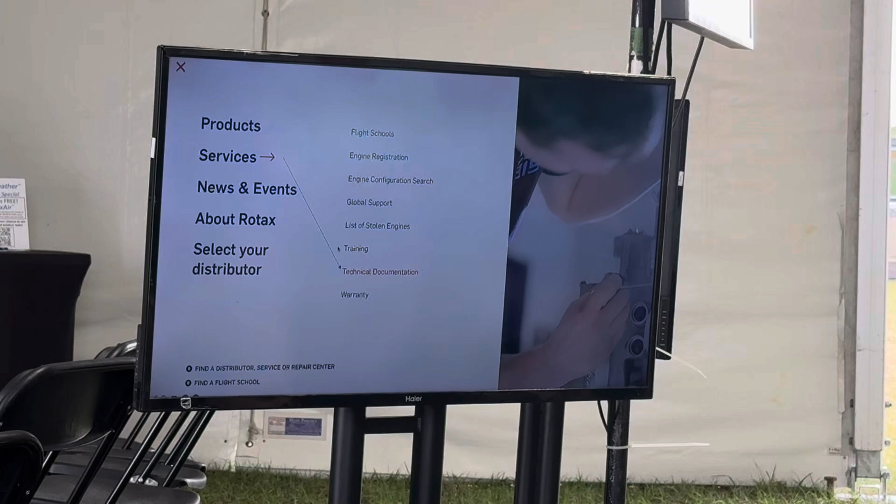It's not for promotion, but if you go to the menu in the upper left corner here, tap on menu, it'll bring up this screen. Click on services, and then down you'll see where it says technical documentation. Can you guys see my pointer? Kind of, there a little bit. Click on technical documentation, and it'll pull up all the manuals and service information you can get.

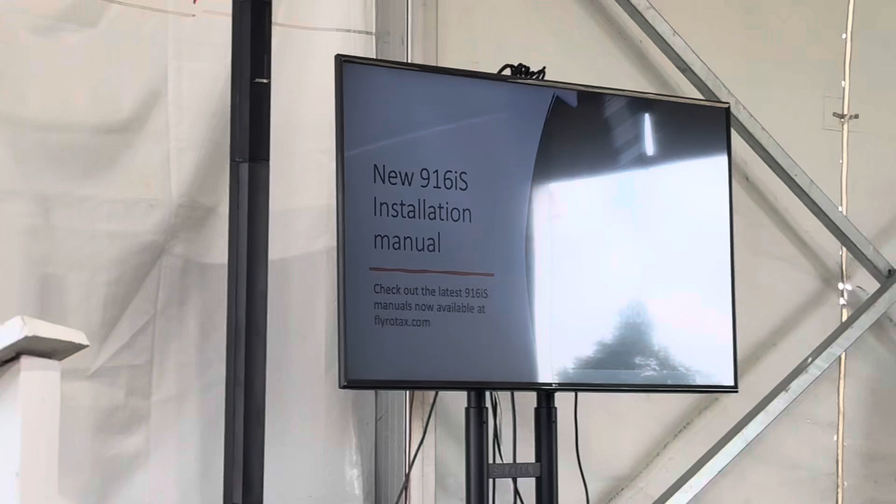In this case, there is a new 916 installation manual, and all the engines have an operator's manual, a maintenance manual, and an installation manual at the minimum. Again, those manuals have a lot of really good information in them.

So let's talk about the spark plugs. Rotax has changed the spark plugs recently. We used to use the NGK spark plugs, and they have now developed their own spark plug. I think NGK is not real happy about their spark plugs being used in aircraft, so Rotax had to develop their own. It is a very nice plug, an improvement over the NGK. It will last twice as long.

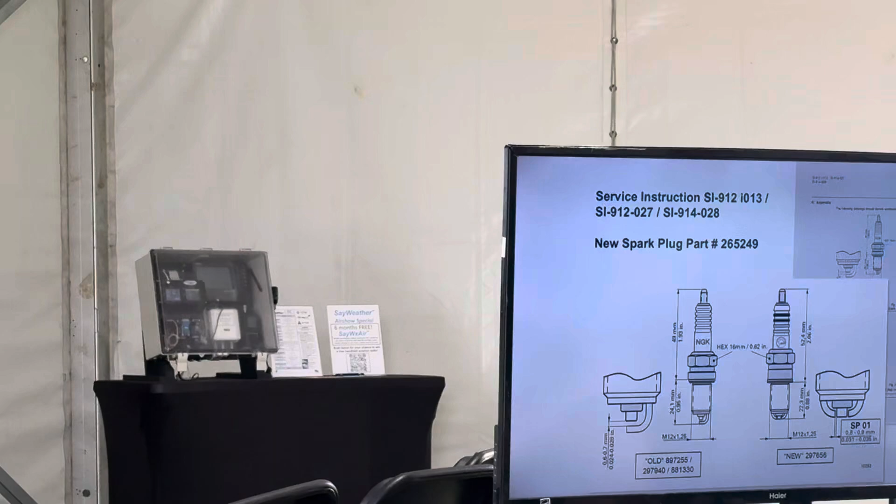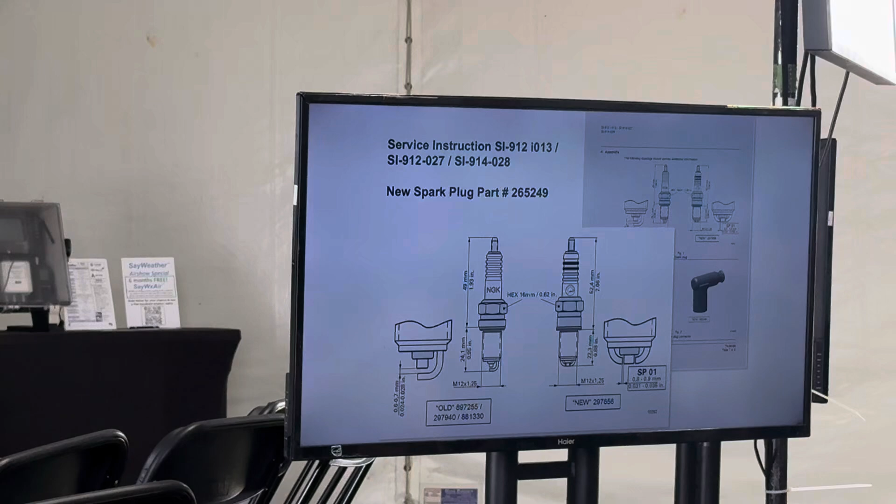The differences you can see pretty plainly in this slide. The new spark plug is a dual electrode spark plug. It comes pre-gapped, made specifically for the Rotax engines. You never have to gap it. Whereas the old NGK plugs weren't necessarily gapped because they were made for other applications, so you had to make sure those were gapped properly. Typically we would gap those to 28 thousandths of an inch. On the new plugs it's 31 to 35 thousandths. So that's the range we're looking for.

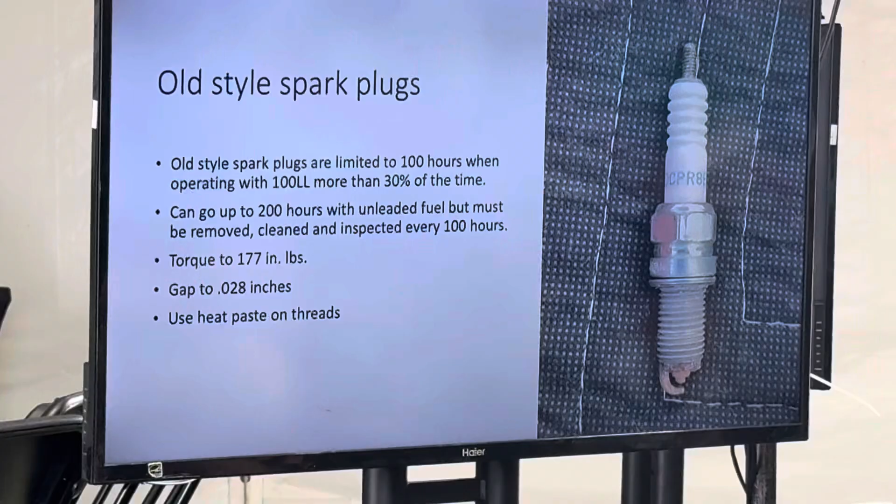Plug life is that 30% limit. You can go 200 hours with unleaded fuel. At that point they have to be removed, cleaned, and inspected every 100 hours. They're torqued to 177 inch-pounds, and gapped to 28 thousandths. On all the spark plugs, whether new style or old style leftovers, you want to use heat paste on the threads to help transfer heat from the spark plug into the liquid-cooled cylinder head.

What's the gap on it? Yeah, and I haven't seen one get to the point where it was at the max. They wear pretty slowly. But if you were to get to the max, then you would throw it away. You can't re-gap those.

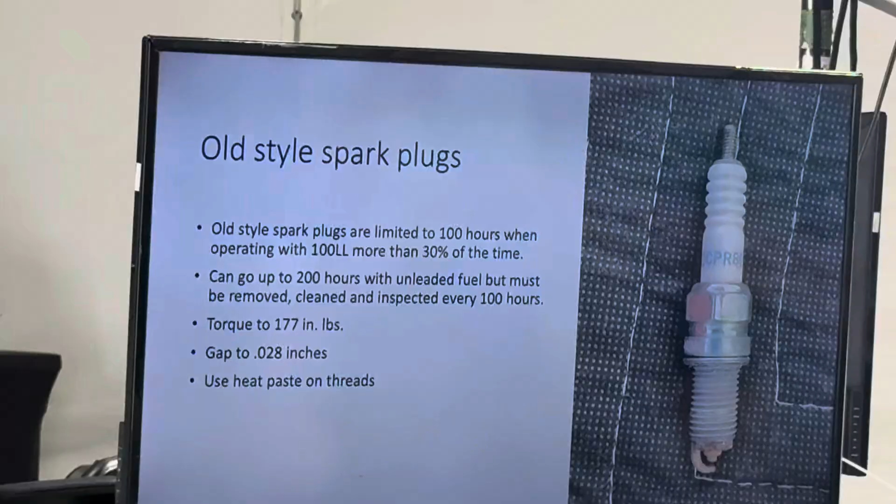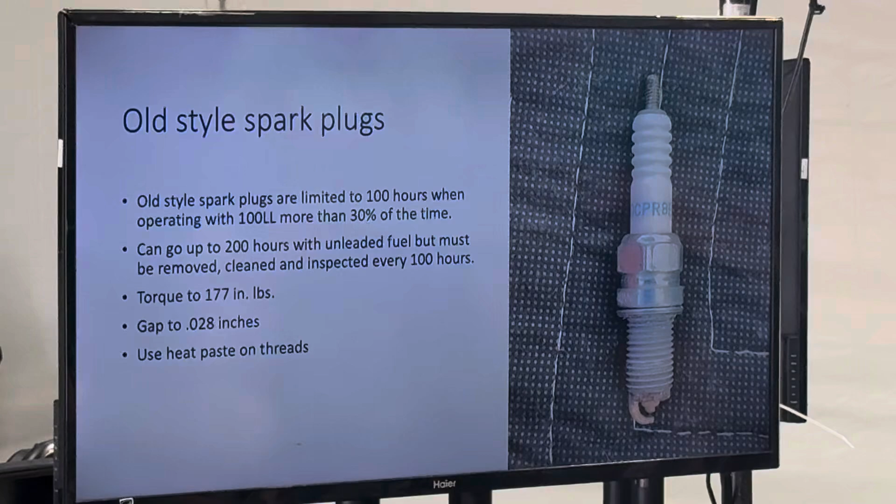Has some paste on it. You can also see that the color of the spark plug is quite good. It's the color of a paper grocery bag, back when we used to be able to get those in the grocery store. That is kind of the ideal color. It tells you that the engine is burning with the right mixture.

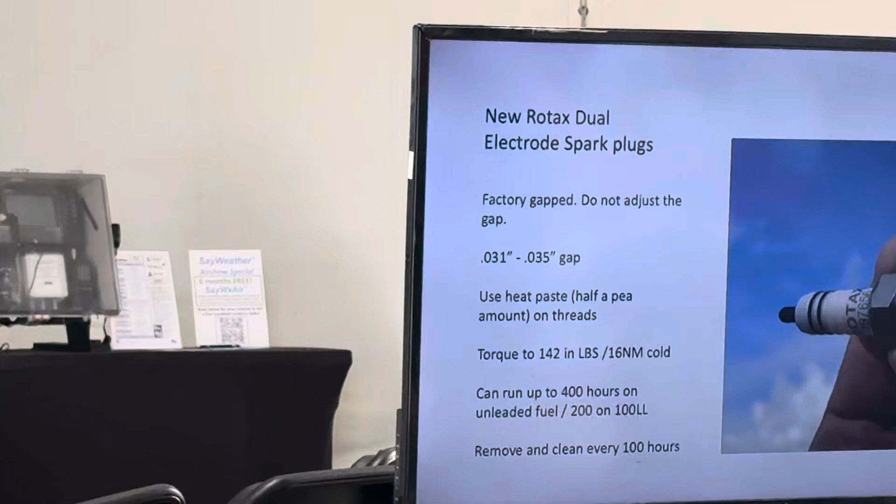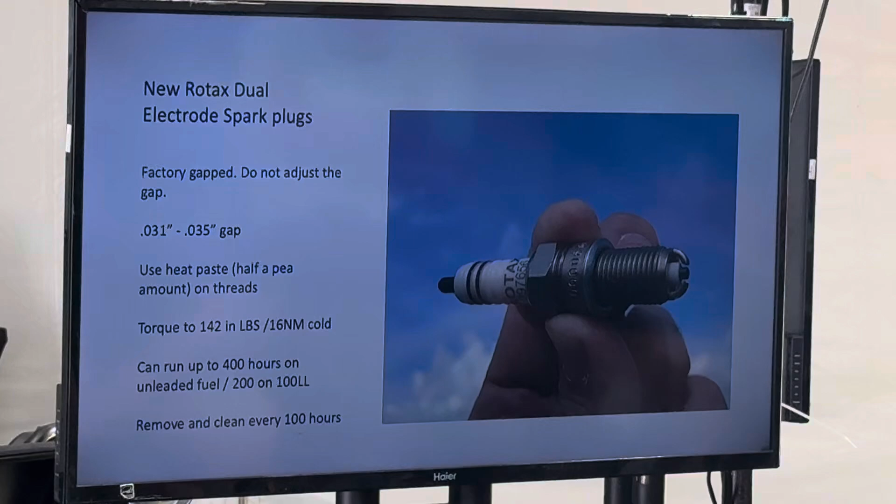This is the new style plug. Again, they're factory gapped, and they're at the lower limit when they start, 31 thousandths. You want to use that heat paste on there, just like half a pea worth of that white heat paste. We do sell it in little tubes, and I think they have it in the booth in building D if you need some. These get torqued to a different spec, so you want to be careful not to mix them up. It's only 142 inch-pounds, which is 16 Newton meters, and that's on a cold engine.

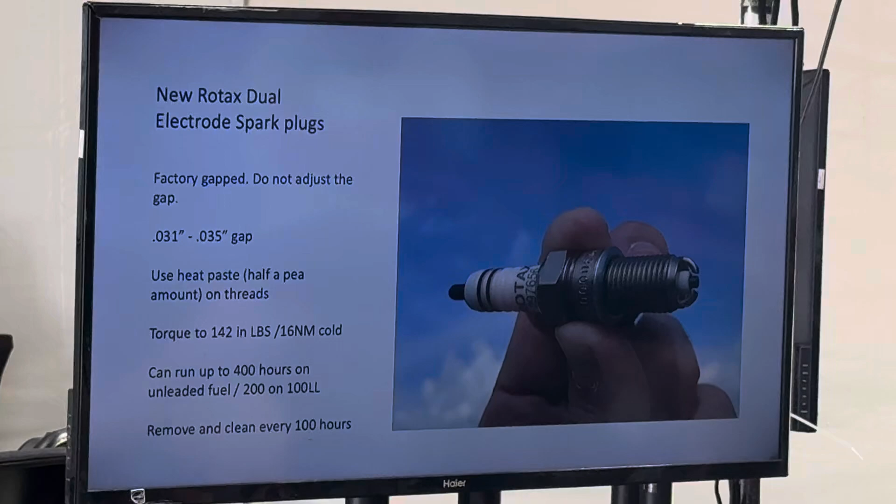Okay, so the engine wants to be cool. You're dealing with aluminum heads. Those can run up to 400 hours on unleaded fuel, either Swift UL94 or unleaded auto gas. If you're using leaded fuel, they still should be inspected and cleaned every 100 hours, and you'll get 200 hours out of them versus 100 for the old ones.

One thing I'll caution you on - some people will go over 100 hours on their spark plugs, especially if using unleaded fuel. You can get more than 100 hours, but the problem is you'll build up a lot of crust on that spark plug. When you pull it out past 100 hours, you might have trouble getting it out because you're dragging carbon buildup through the aluminum head. You might ruin the head getting it out, and a cylinder head is a lot more expensive than a spark plug. So I'd advise you to try not to go more than 100 hours.

If you're a technician working on an engine and you find a spark plug that doesn't want to come out, don't force it. You may be able to gently work it back and forth, but if it's giving a lot of trouble, you basically have to pull the head off, clean all the carbon off the inside where the plug sits, and then you'll be able to get it out without damaging the head.

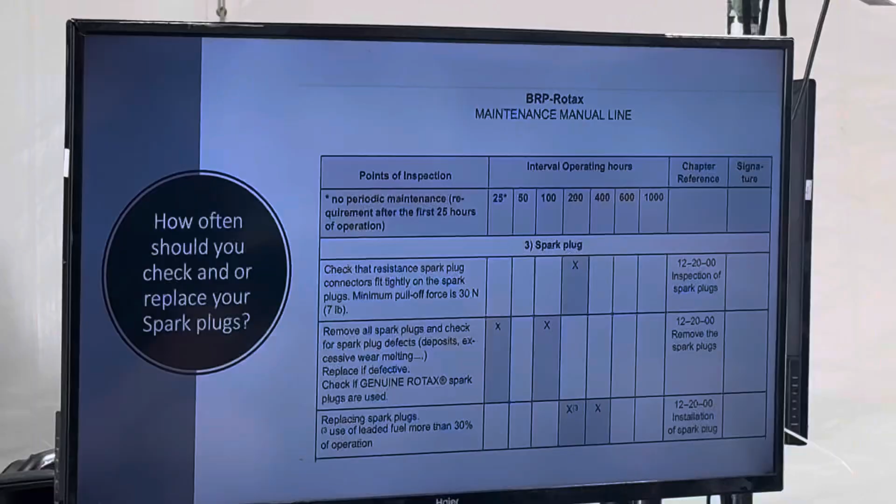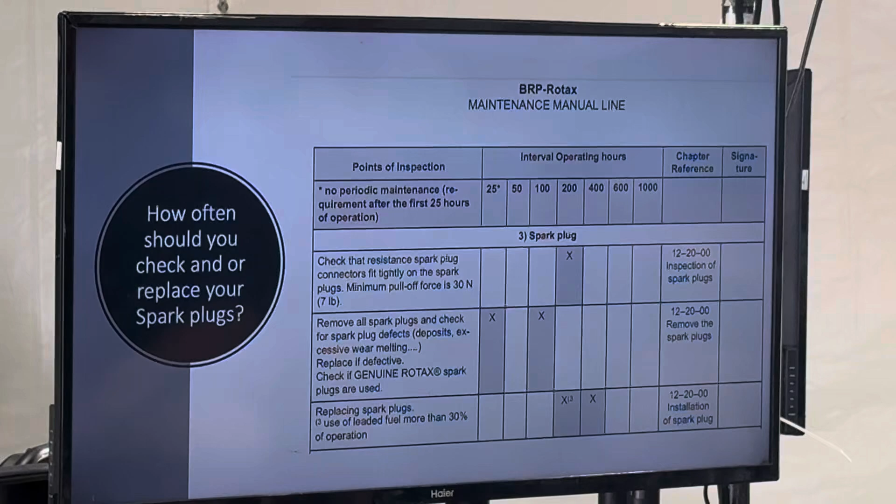The first 25-hour inspection for a new engine is when you want to get that break-in oil out of the engine. You check the spark plugs, and you're basically doing almost everything a 100-hour inspection would involve. That's important on a brand new engine installation - really check everything, make sure you're not getting excessive metal in the oil on the magnetic plug, make sure there are no hoses rubbing, and that everything looks good inside the installation. Check the spark plugs, make sure it's burning properly.

The 50-hour inspection is optional - to be honest, not many people do that. Then you're into the 100-hour intervals. It's pretty straightforward, but I'd advise you to look in the manuals - they'll tell you exactly what you need to do and when. It's all tied to whether you're using leaded fuel more than 30% of the time.

In a case where that plug was in there a long time, you can see how the crud builds up on the spark plug. Again, if you leave them in too long, you'll damage the head trying to get them out.

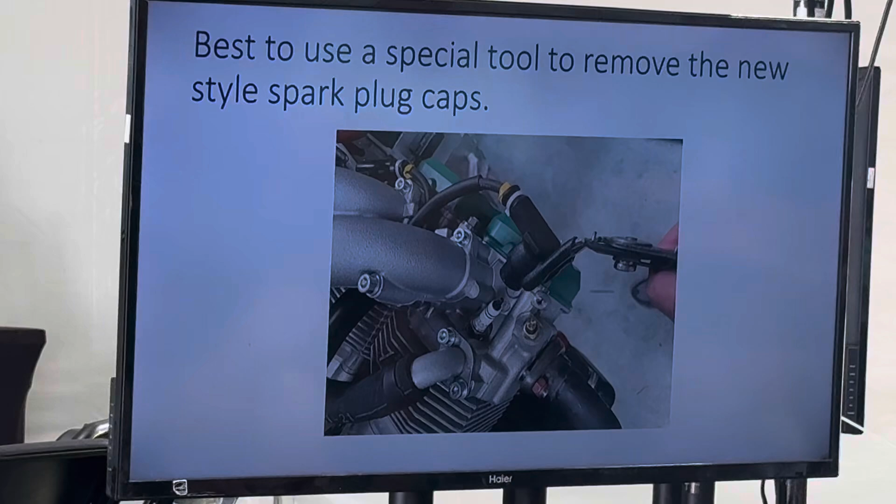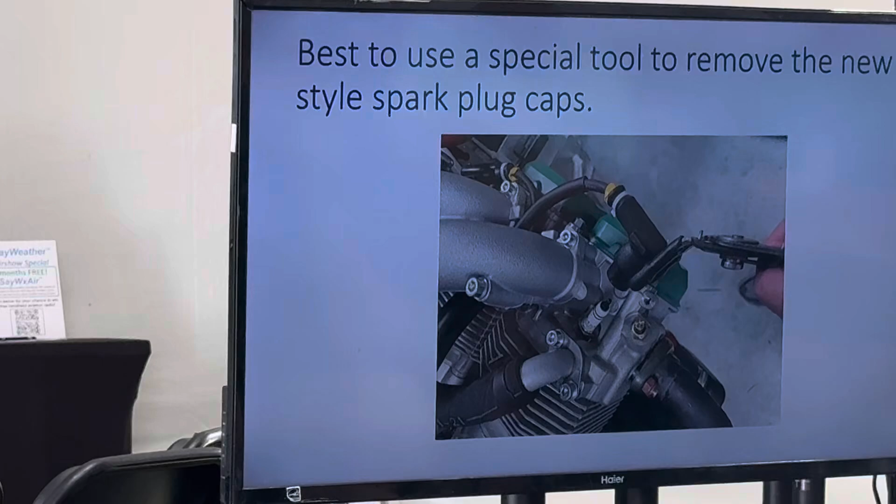For the new spark plugs, it's recommended you use the right tool to pull the caps off, because the caps are very aggressive - they really grab onto that spark plug hard. It's a great idea if you can get the right tool, like shown in this picture, that allows you to pull it straight off. If you force it at an angle, you can break the porcelain on the plug, and the plugs aren't cheap, so you don't want to do that.

So let's talk about oil on these engines a little bit. The Aeroshell Sport Plus 4 has been around for a while - Aeroshell developed this oil just for the 9 Series Rotax engines. It's a great product, and we're happy to have it.

One of the big differences between this and regular automotive oil is that it's got a lot of zinc and phosphorus, a combination they call ZDDP. That really protects the camshaft and lifters, because we don't have roller lifters - our lifters ride right on the camshaft metal to metal, so we need that product. That used to be in automotive oil back in the 60s before unleaded gas and catalytic converters came out. They had to take it out of automotive oil because trace amounts of it would get burnt, go through the exhaust, and destroy the catalytic converter.

But we don't have a catalytic converter, so we can have those products in there. They've even taken it out of a lot of the new motorcycle oils because I think they have catalytic converters as well now, so it's a special product. It does work really well, and I would advise you to use one of the two oils I'm going to show you versus something else which was not made specifically for these engines.

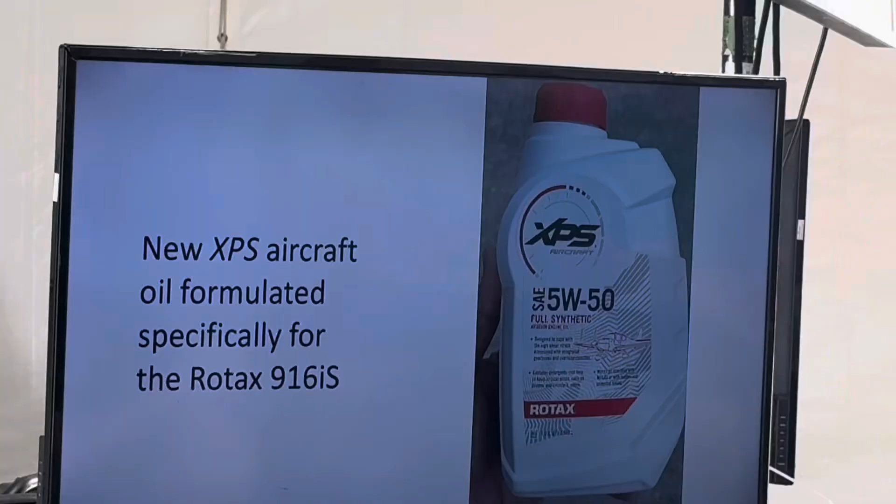It works with leaded avgas 100LL, and that's a real trick. I've talked to a number of people who have been using it with 100LL, and they are very impressed with how well it works at carrying the lead. I think it probably does a better job than the AeroShell, which is a blend, which is amazing. So they've found some special chemistry there that enables them to do that.

As far as which oil to use, I would say if you're running a turbocharged Rotax engine, you would benefit greatly from switching to the XPS because of the full synthetic and higher temperature capability of that oil. Your turbocharger is going to benefit. So 914, 915, 916 IS, those engines should really be running on the XPS now that it's available. If you're running a normally aspirated 912 IS, 912 UL, 912 ULS, the regular AeroShell is fine. Although we do see some benefits if you're running 100LL to the new XPS. So 100-hour oil change intervals are possible with unleaded fuel.

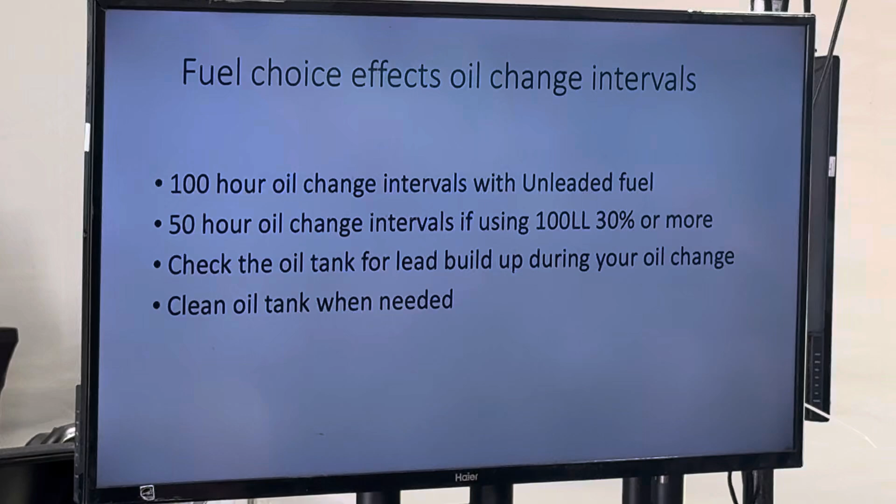Now the unleaded fuel is available in different forms. You've got auto gas, 91 octane or higher for most of the engines, or the Swift UL94. There are some new fuels coming out. Swift is coming out with a new 100R, which we're hoping is going to be a drop-in replacement, and they're actually blending that now. We're hoping that Rotax is going to run a test on that soon, so we're waiting to see how that works out for us.

Like 93 octane ethanol free versus 91. Well, the ethanol free... I can't talk this morning. I didn't get any coffee this morning, man.

Tell you what, so the ethanol free, there are some benefits to it, and it's not as aggressive on the fuel tanks, a lot of the sealants and fuel tank materials. But all in all, it still has to meet the modern emissions, so it still has some of the same drawbacks that all the auto gases have. The higher the octane, the less likely you're going to get detonation. If your temperatures are within the ranges that Rotax gives you for limits, the 91 will do the trick. If you were to go outside of one of those limitations, or over boost in one of the turbos, then the higher the octane, the better.

Florida has 87, 89, 93. You don't really see a lot of 93, but we got a lot of folks who buy it. In fact, I buy mine at the Murphy gas station because they sell 93 octane. Yeah, 93 is fine, I'm just saying 91, I have a hard time finding. Any Wawa has it, 87, 89, 91, 93. Yeah, and if you go to higher elevations, like out west, they won't bother with the 93 because nobody's engine is putting out the power for it, right? A lot of cars, like even BMW, most of their cars say 91 octane or higher is good enough. So but there's nothing wrong with 93. If that's what you can get, use it, it's fine.

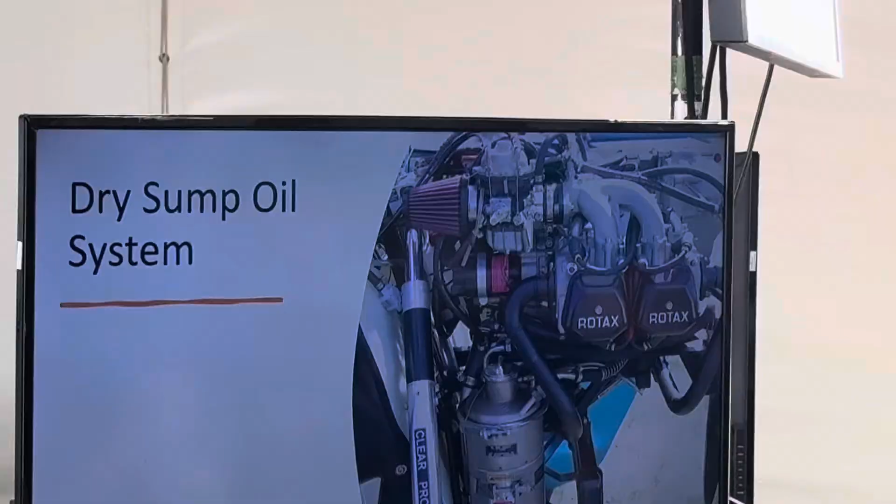You also get a little more cooling on the oil tank, depending on how much air you have blowing on it. With the oil tank being separate, it's a fairly thin stainless steel, so you're going to get some cooling with the oil in the tank. It allows us to have a smaller quantity of oil because the oil tank is ideally shaped, tall and skinny, with the draw tube in the very bottom of the tank, so that we can assure that you're going to get oil at a wide variety of angle of attack.

We typically only have about 3 quarts in the system, which helps keep the engine lighter, better for the environment. We're only using 3 quarts of oil, and of course it saves on oil change costs.

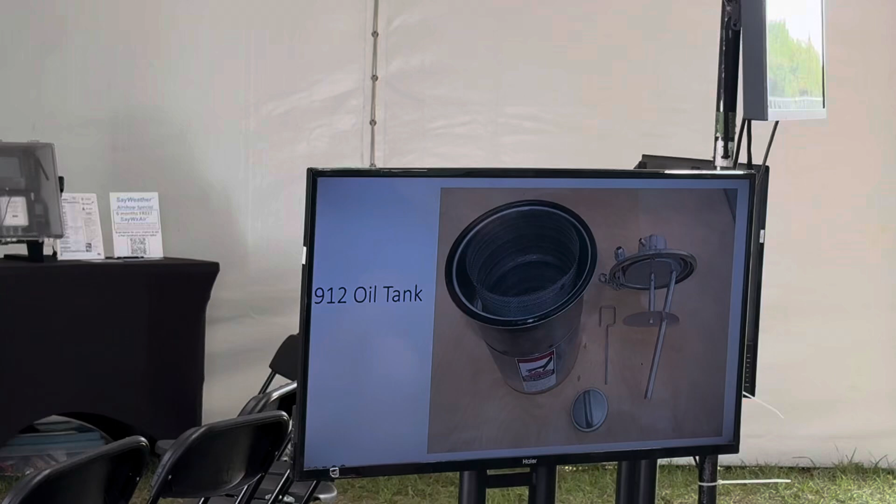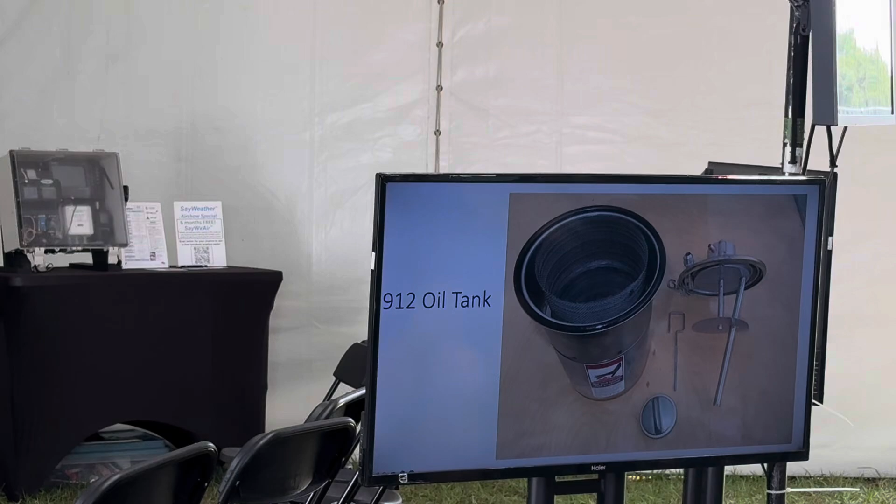That's the draw tube that actually draws the oil, and that's down in the bottom of the tank. Here in the center you can see an oil screen, and on the outside edge is the return line. So the oil from the engine is being returned between the screen and the outer portion of the tank. If there is any metal or bubbles, and there will be air bubbles in the oil that's being returned, that screen will break up the bubbles and stop any large metal pieces from getting into the center area. The center area is where the draw tube is, and you're drawing your oil up.

Again, that screen also is important to break up any bubbles in the oil so that you're getting pure unaerated oil into the engine. Here's a side shot.

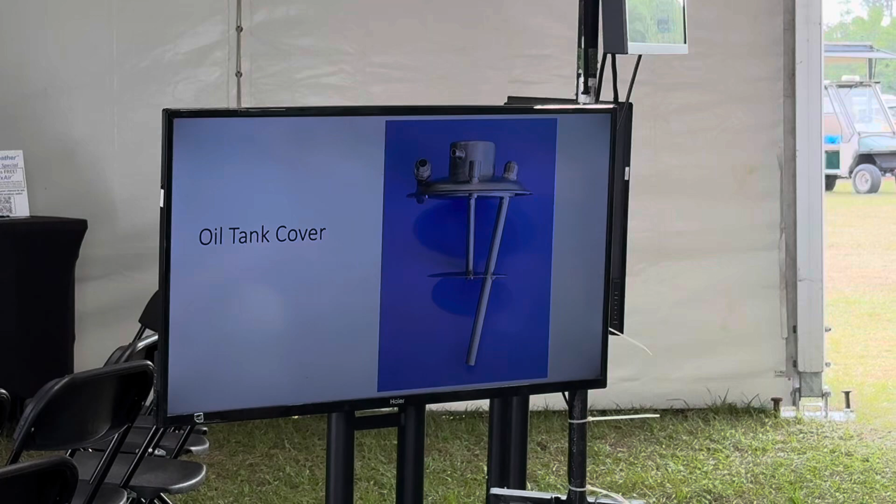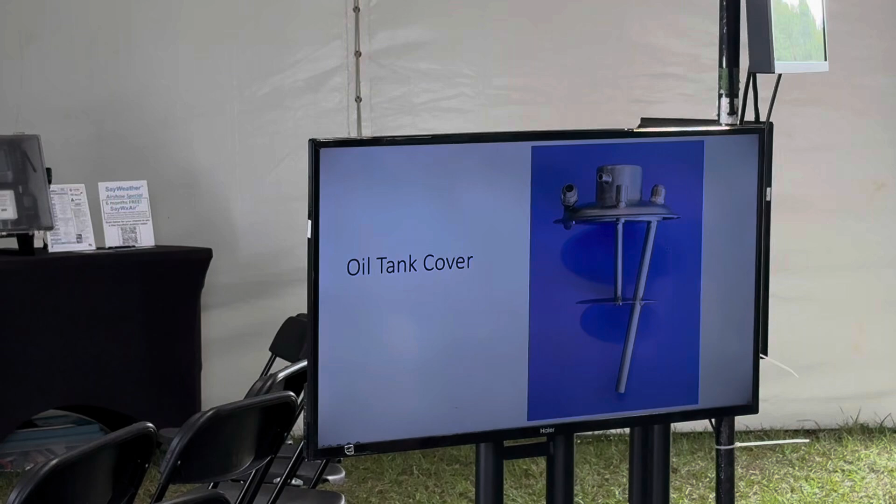It's kind of dramatic in that it shows you what might happen if you hook the lines up incorrectly. If you put your feed line and hook that up to what is the return fitting, the typical oil level in the tank is right about here. You're just going to be drawing air, and you're going to ruin the engine, right? So don't do that, make sure that you get it on the out.

There'll be an out and there'll be an in, and then this little fitting up here is your vent line. The way these engines operate, every piston engine has to have some venting in the crankcase, and ours is no different. Even though the tolerances are very tight and we have very little blow-by, we still have some blow-by. So whenever there's a combustion event in one of your 4 cylinders, some of the gases will get by the rings into the crankcase.

They're going to pressurize the crankcase, and that gas has to go somewhere. The way we get rid of it in the Rotax is we use it to push the hot oil back to the oil tank. So you're going to have fittings on the bottom of your engine. As that gas pressurizes the crankcase, it pushes that oil back to the oil tank. So you're going to get a blob of oil, a blob of air, a blob of oil, a blob of air.

When you burp the engine, which a lot of people talk about when it's cold, what you're doing by pulling the prop through is you're creating some blow-by. Even though you're not getting as much combustion or pressure in the combustion chamber as when the engine's running, you're still creating compression, and some of that is getting by the rings, putting pressure into the crankcase. You're pushing the oil in the crankcase back to the tank, and when you hear a gurgle, that means most of the oil is back and now the air is getting to the tank. So that little vent line is the vent for the crankcase, in essence. As that hot air goes into the oil tank, it escapes through that vent line.

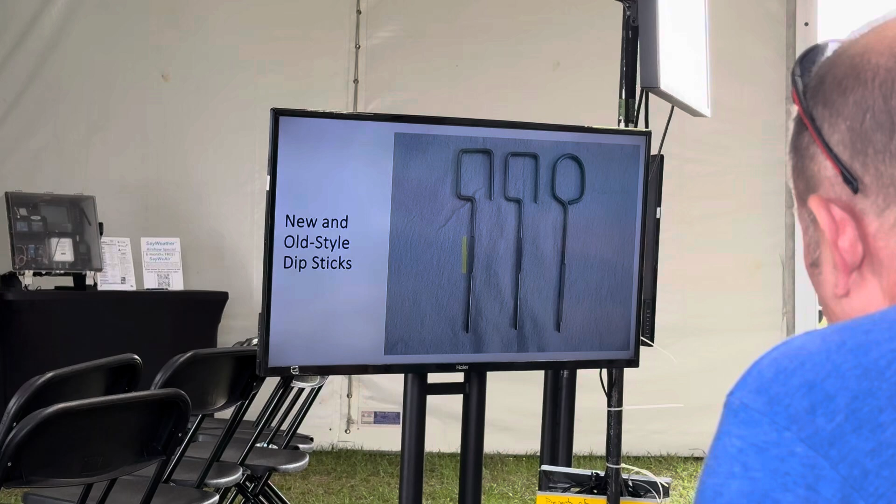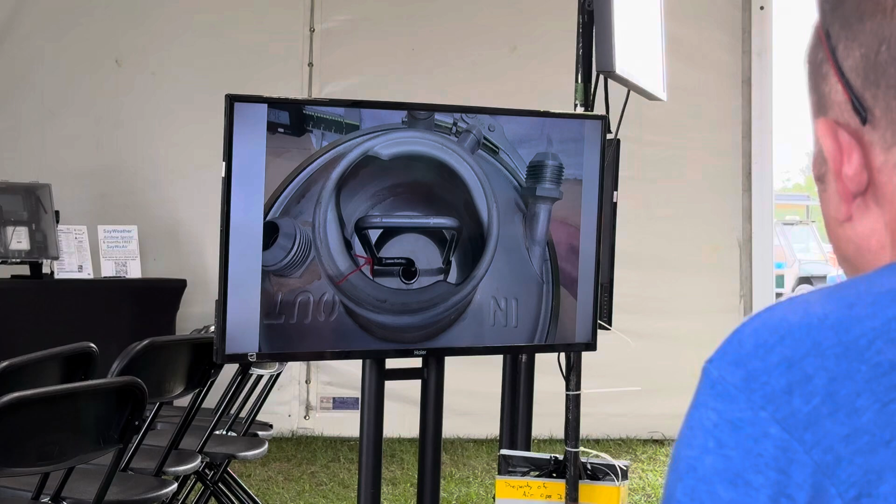The reason I have this shot is if you look at that dipstick on the very left, it's a little different from the others. The top tab that you grab onto is not closed up enough, which means when you go to drop that in, it might hang up. Right here in this picture, you can see where that dipstick is actually hanging up in the top of the tank, and it's not going down all the way.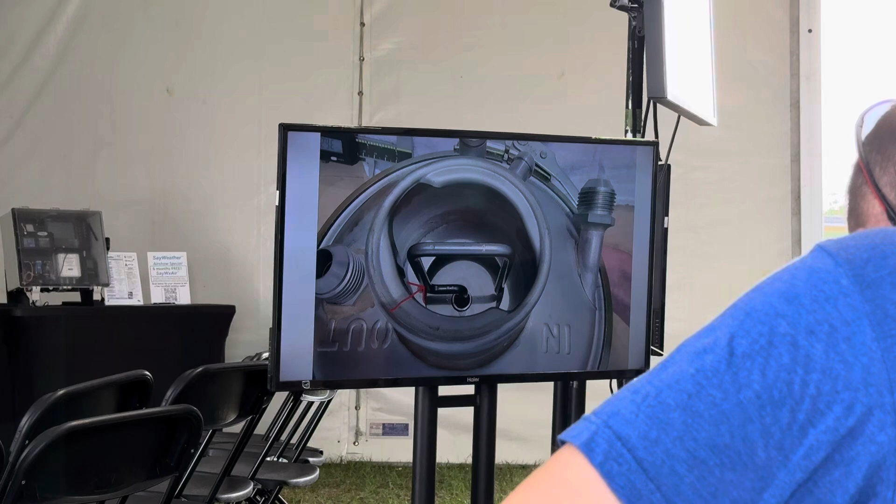You have to be careful if you have one made like that. You can usually push them down, but if you just drop it in, it may not go down all the way, which means you may be putting too much oil in your tank because your level is effectively raised up. So if you get one, make sure yours does go down all the way. And sometimes the hole it's sitting in is not even cut perfectly round. I've seen them where they'll go in at one angle, you turn them 90 degrees, and they won't go in. So you need to be aware of that so it doesn't catch you off guard.

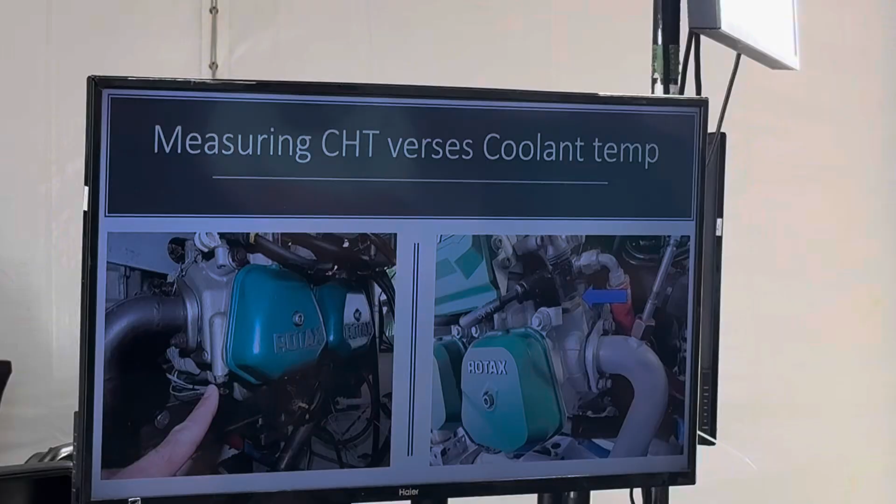What Rotax did was decide that coolant temperature is probably more important than cylinder head temperature because it has a lower maximum. 248 degrees Fahrenheit is the max, whereas on the cylinder head, most of them are 275. So it could be possible that you exceed your maximum coolant temp without exceeding the maximum cylinder head temp.

So on the newer engines, on the right picture there, they switched, and now they're reading at the top of the cylinder, right at the exhaust port, which is the hottest point of the coolant, what the coolant temperature is.

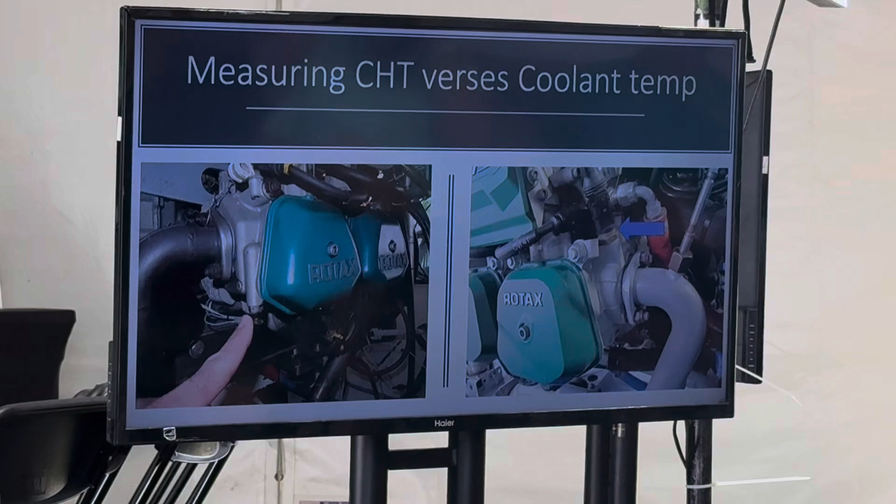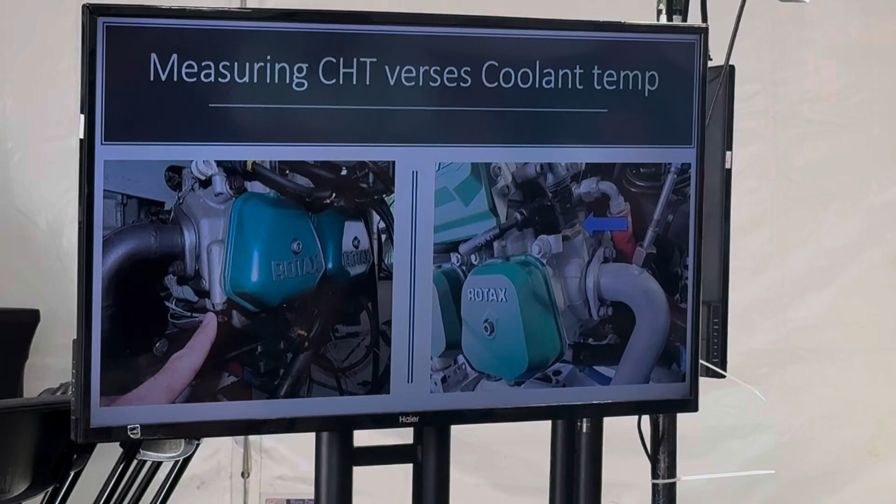So the point is, if you swap engines, if you have an older airplane with one of these engines like the one on the left and you swap to a new engine, you're going to need to recalibrate your instruments. They'll probably be showing 275 as the limit, but now you're reading coolant temp, and it's going to be 248. So you need to make sure your instruments are changed to match that.

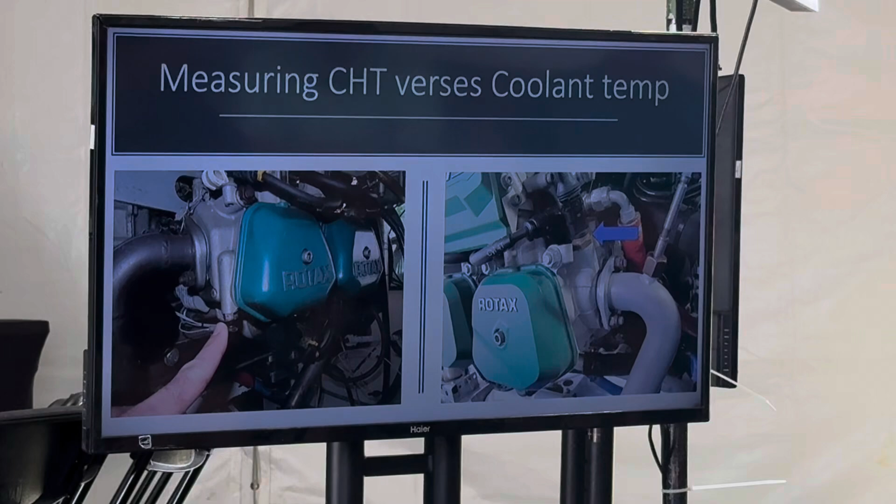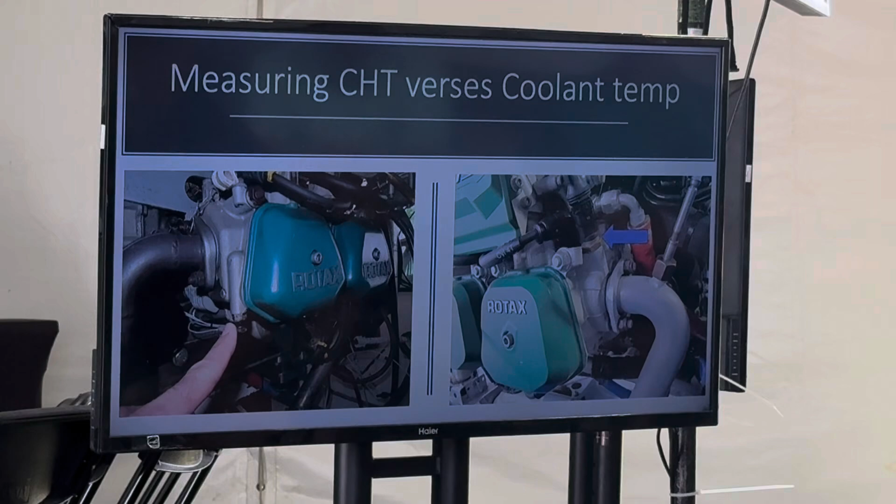We can't get those old cylinder heads anymore. So if you overheat a cylinder head and have to change it, you'll have to put on the new style. If it happens to be the one with your cylinder head temp probe on it, you'll also have to change over and realize that now you're reading coolant temp instead. The heads are compatible, so you can just change one head to the new style.

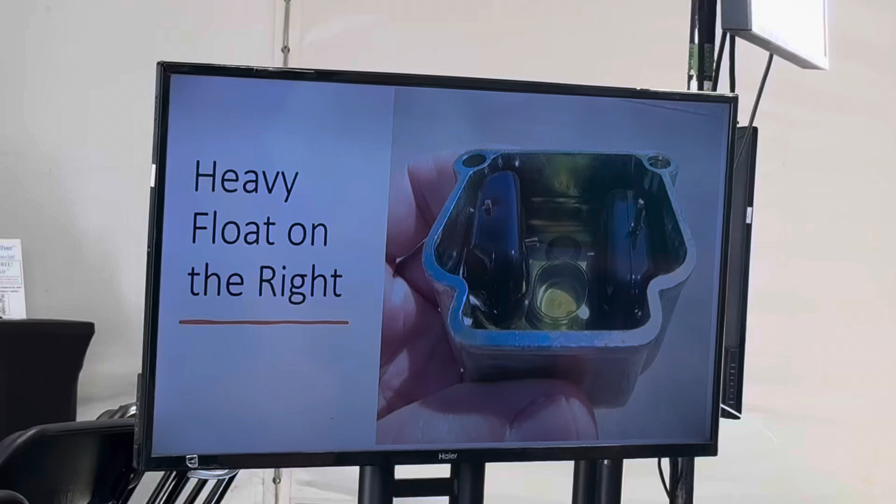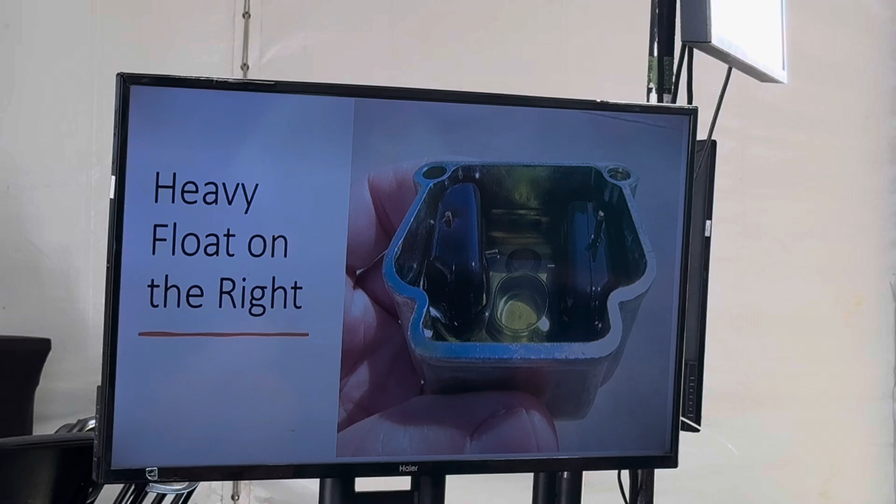It's not the carburetor. We took the float bowl and dropped it off. You can see the float on the right is clearly a lot heavier than the one on the left. Those are floats that probably were made at the same time and installed at the same time. One absorbed fuel and one didn't, and that's what we see.

So this would be a way I would do a quick field check if I had a problem, if the engine was exhibiting a problem that could be related to heavy floats. I could drop the float bowl. I don't have a gram scale with me, but I can see if both floats are floating correctly.

If the top of the float is even with the rim of the bowl, like the one on the left, it's probably pretty good. If it's sinking, it's going to look like the one on the right, and it's going to drop down into the fuel. I've seen them where they sit on the bottom, just sinking right to the bottom of the float bowl.

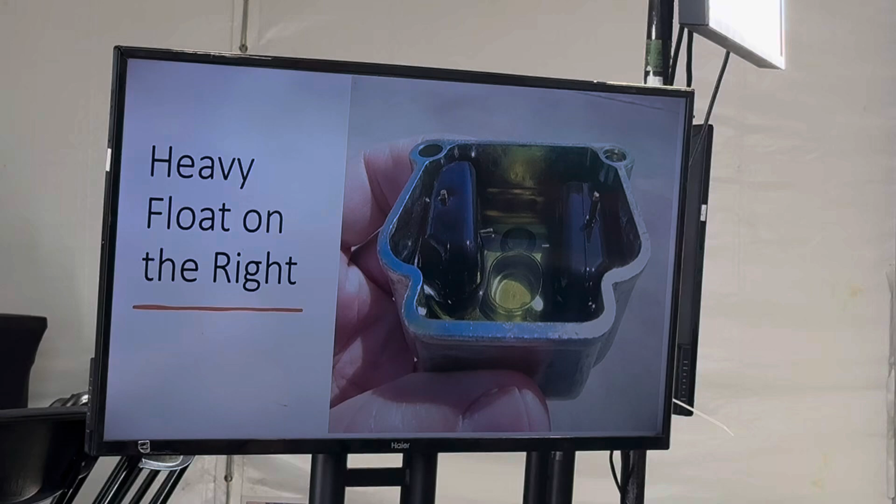But if it's working correctly, the little brass pin that comes out of the center of the float, which the float arm rides on to shut the fuel off and meter the flow of fuel into the float bowl, is right here. You'll see it kind of piercing the fuel level. So it'll be sitting there floating, not above, not below, but piercing the fuel level, whereas the heavy one will be completely under the fuel level.

They can be checked with a vacuum gauge.

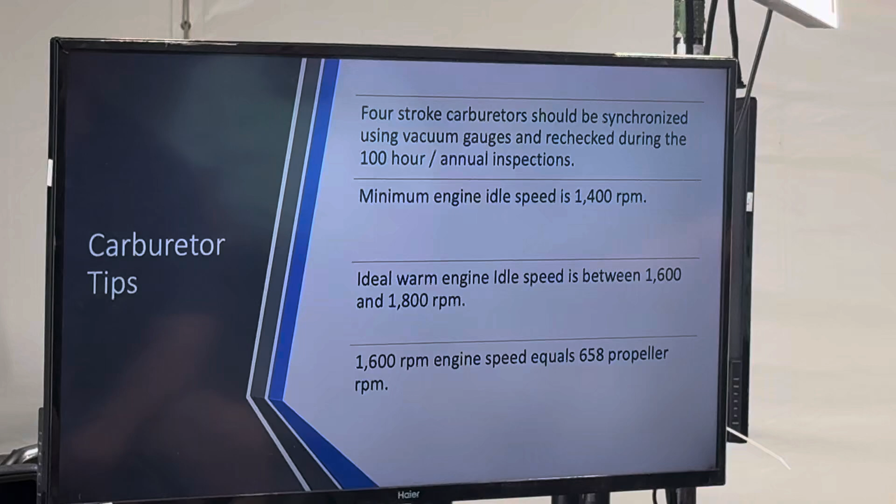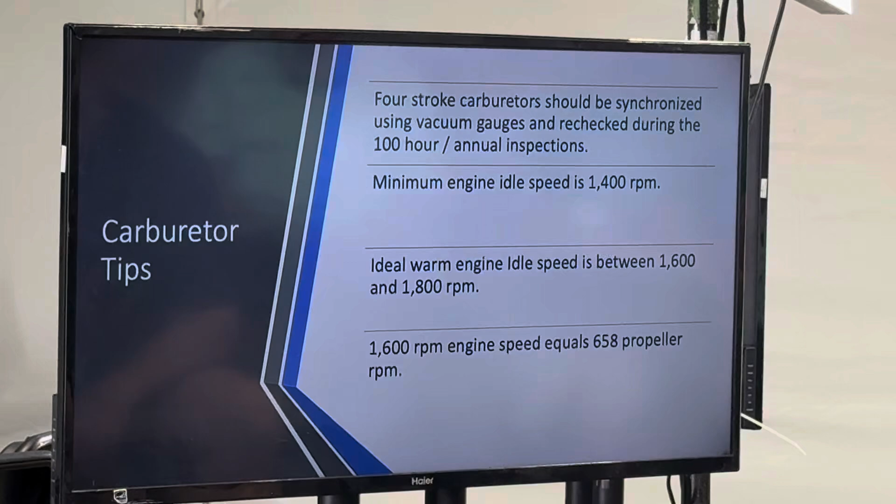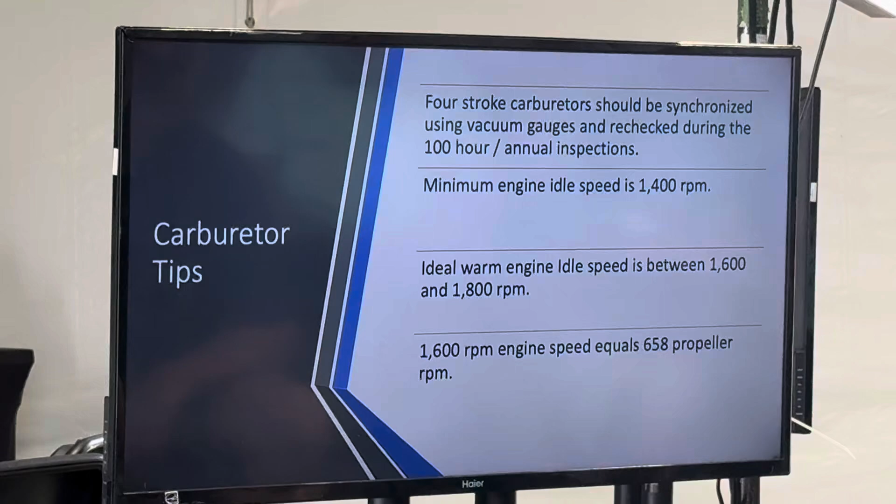It's critical that the carburetors are balanced perfectly. If one carburetor's throttle is slightly more advanced than the other—we're talking thousandths of an inch, which you can't measure mechanically—you need to use vacuum gauges to get it right. Otherwise one set of cylinders will fire harder than the other, creating excess torsional vibration in the crank, and the two banks of cylinders will fight each other, putting a hit on the gearbox.

It is a pretty ideal idle for a carbureted 9 series engine. You can idle up to 1800. If you go over 1800, you're probably going to have a little bit of a hard time landing—you'll be riding the brakes when taxiing, and your choke won't work.

That's because the choke on these engines isn't really a choke, it's an enrichening circuit, and it relies on the butterfly valve being almost totally closed. So if your idle is set too high, the butterfly isn't closed enough, and the choke circuit won't deliver the right amount of fuel.

Along the same line, you need the throttle all the way at idle when starting a carbureted Rotax engine in cold weather, so the choke circuit works properly—you want the butterfly as closed as you can get it. It's almost all the way closed at idle, but letting a little air through, which is why carb sync is so critical, particularly at idle.

It's not as critical at wide open throttle, because if the butterfly is horizontal, a slight difference between the two won't matter to the engine. But at idle, they're really almost closed. In fact, if you let the idle go much below 1400, it will close all the way and the engine will shut off. That's the main reason we don't want you going below 1400.

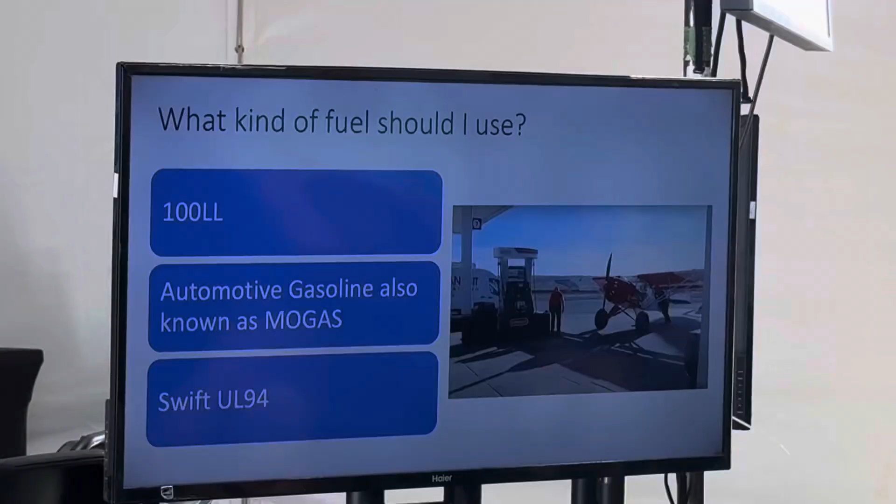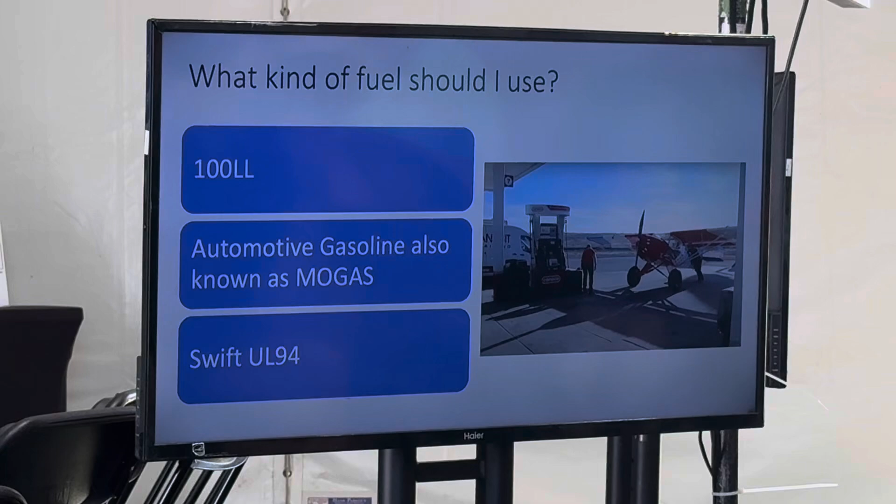So just be careful—make sure your idle doesn't go too low, and try to have a good throttle stop. Fuel prices are typically based on 100LL, which is a good product available at most airports across the country. Other options include automotive gasoline, also called MoGas, and Swift UL94. Those are the options out there right now.

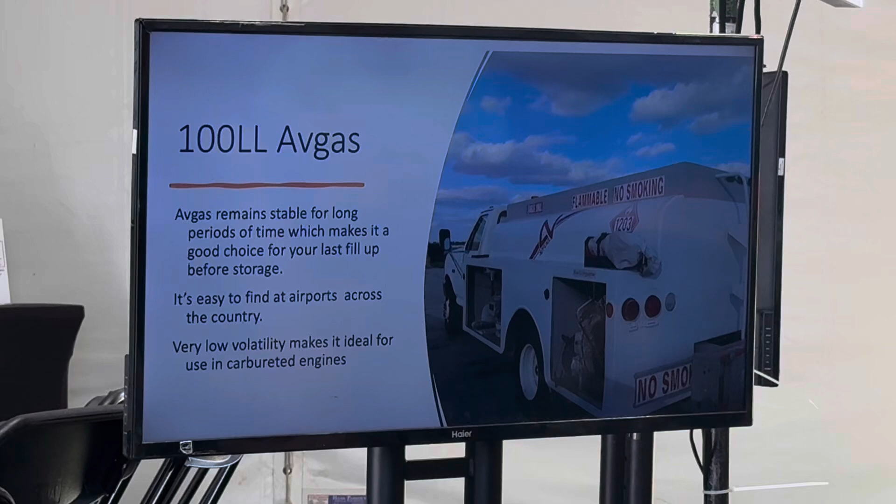Let's talk about avgas first. Avgas is a fuel blended specifically for aviation use. One of the things that makes it really good for aviation is its very low volatility—it was engineered and blended to sit and live in a vented fuel tank.

I think 'low lead' is a bit of a misnomer—like my kids would say when they were little, it should be called 'a lot of lead, Dad.' It has as much as 18 times more tetraethyl lead than autogas had back in the 60s. That lead was put in there to help raise the octane and protect the valves in older Lycoming, Continental, and other engines that didn't have hardened valve seats—they needed that lead to stop metal transfer between the valve seat and the valve itself.

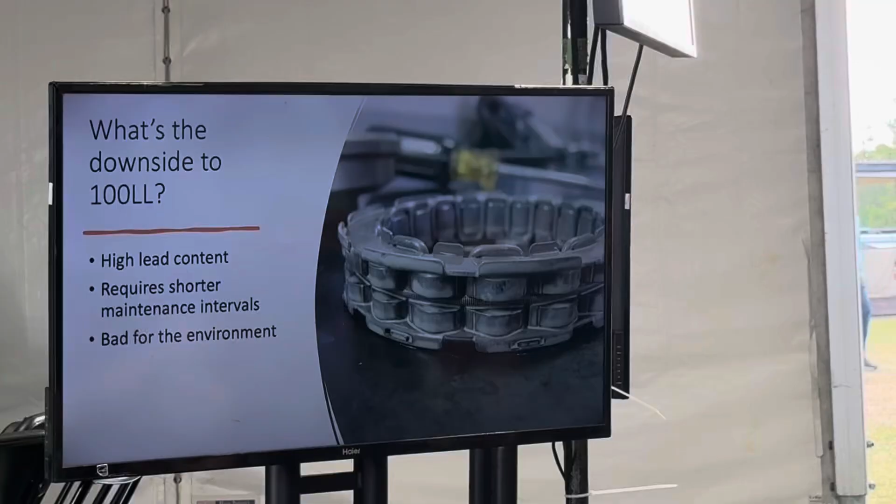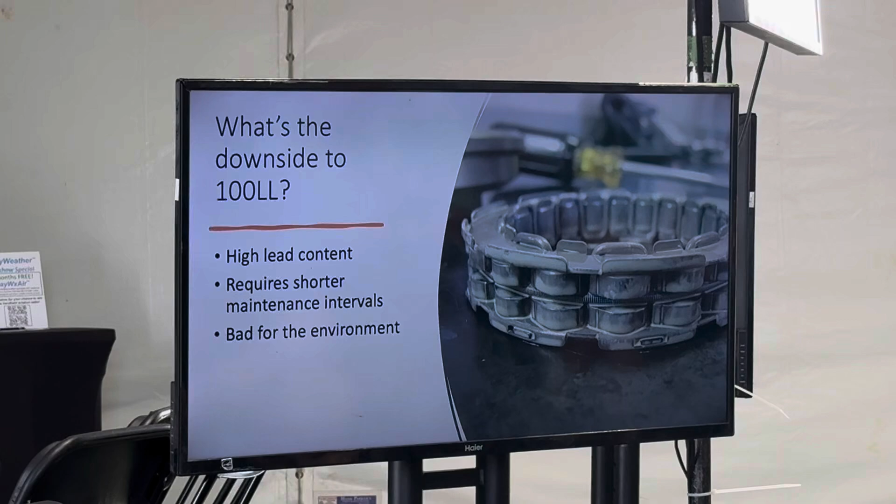The tradeoff is you build up a lot of lead in the oil, and it starts building up in the passageways. It particularly doesn't like the base stock used to make synthetic oils. Somehow XPS has managed to break through that barrier and make a full synthetic oil that's compatible with 100LL.

If you remember, maybe 20 years ago, Mobil 1 had a special oil they came out with for aviation, and then they started finding they were having big lead paste problems, and they pulled it off the market. That was because the base stock they used turned out to be not compatible with 100LL.

This is a sprag clutch assembly. It's that little clutch that allows the engine to start, so the starter actually engages with the sprag clutch, which overrides when you're not using the starter. That's kind of a cool deal, because if you stay on the starter after the engine starts, you don't hurt anything. You don't have a Bendix, and it won't hang up. But if it gets too much lead in it, it might not work properly.

If I'm using avgas a lot on a cross country, then I will probably be adding the Decalin to my fuel tanks.

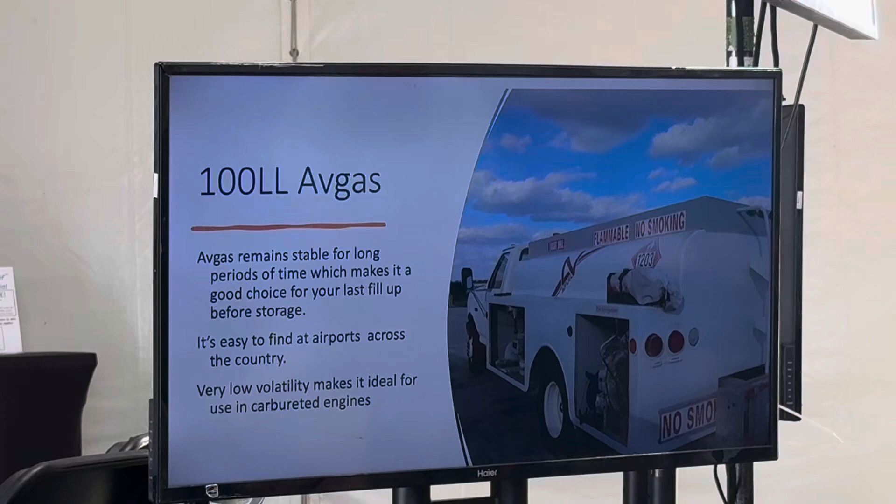One of the things I forgot to mention about 100LL is it's a good choice for the last fill up of the year. So if you live up north, in a cold climate, and you park your airplane for a few months in the winter, and you want to make sure your fuel is going to be good in the spring and your carburetors aren't going to be gummed up, avgas is a good choice. Put avgas in the tank before you put the plane to bed, and make sure you run it to get it in the carburetors, because if you have auto gas in your carburetors and you put avgas in your tank but don't run it, the carburetors are still going to get messed up.

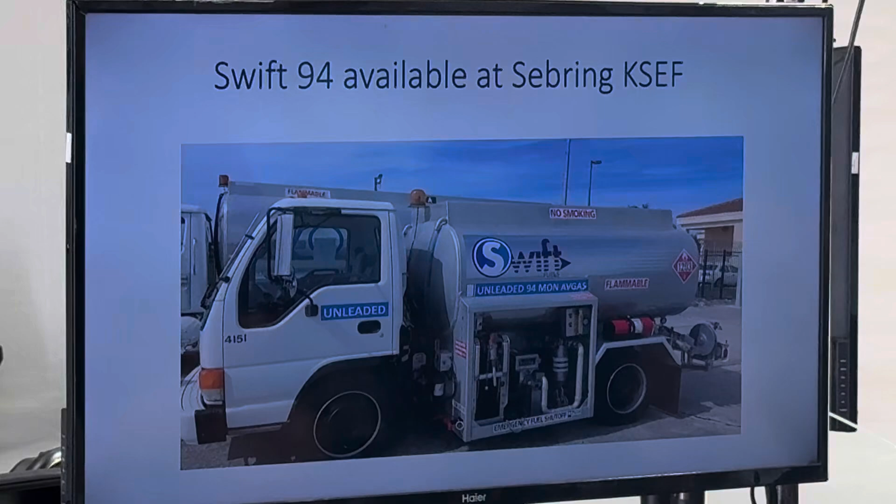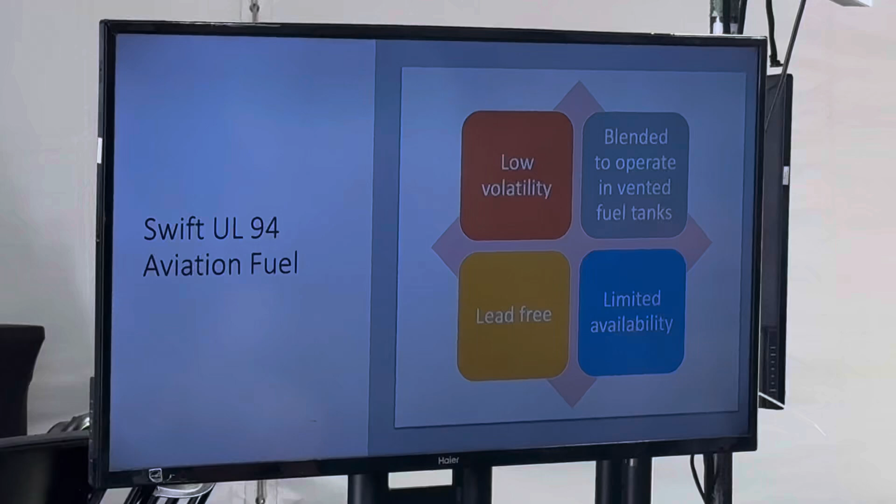Swift fuel has low volatility, engineered and blended to live in a vented fuel tank, good at high temperatures, good at low pressures, no lead. So all the benefits of avgas with none of the negative sides, because there's no lead. Plenty of octane for us - it's a MON rating of 94, which would be an AKI rating of like 97. So compared to auto gas, it's really high, but not as high as 100LL. Lead free, and the problem is limited availability with the Swift.

Let's talk about auto gas. Auto gas is available all across the country. Every town has a gas station. Usually you can get the different octanes that you need. It's less expensive than avgas. Unleaded formula allows for extended oil change intervals and longer spark plug life. Unleaded fuel is better for the environment. It's readily available in every town. So those are all the pluses of auto gas.

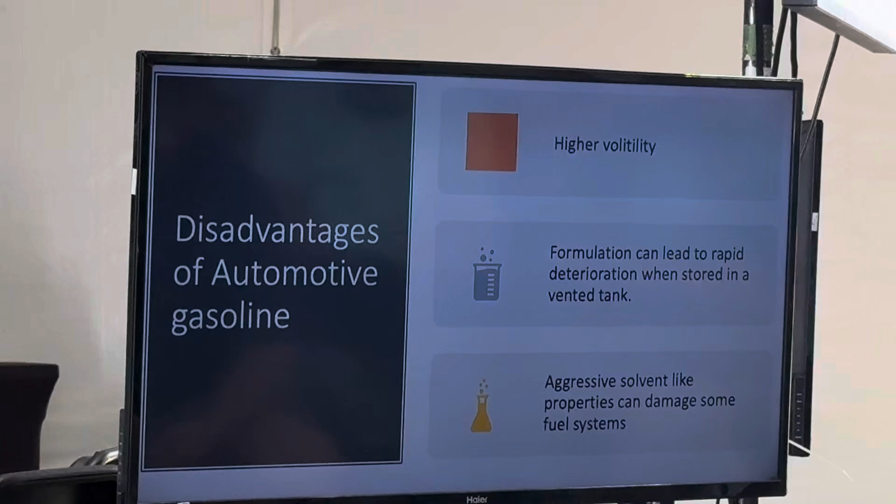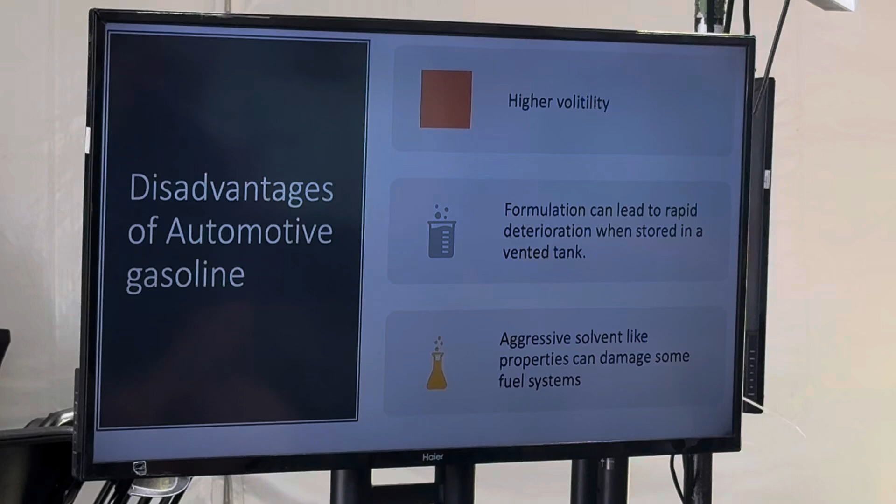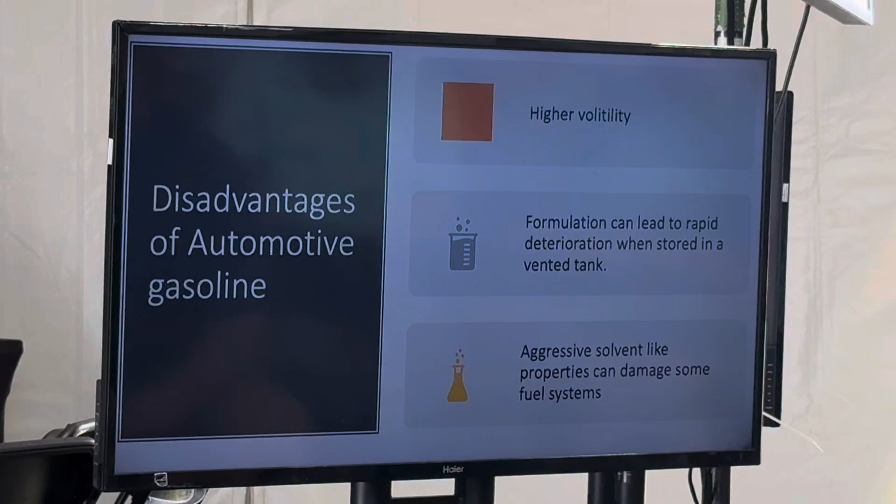Disadvantages: much higher volatility. The formulation can lead to rapid deterioration when stored in a vented tank. And it has aggressive solvent-like properties that can damage some fuel systems. I know that if I spill auto gas on the hangar floor in my shop, it eats the paint off the floor. If I spill avgas on the floor, it just cleans it - you just wipe it up and you've got a clean spot. It's definitely not as aggressive a solvent.

The tank builds a certain amount of pressure, much more than ambient, to stop the transfer of liquid to gaseous state from taking place, so the fuel stays stable. If it were to get to a dangerous level, there's a relief valve in your tank that will let the extra pressure off. But normally it's under pressure unless it's really cold weather, where typically it's not a problem. The other thing is, in modern automobiles, the fuel pumps are right in the tank or right underneath it, so under no circumstances is the fuel ever under suction.

There's head pressure to the pumps, and then the pumps are pressurized all the way to the fuel rail. That reminds me, I've got to silence my phone.

Sorry. And to burn really clean. To make matters even worse, there's a winter blend and a summer blend fuel. The summer blend fuel actually works reasonably well in a lot of airplanes. The winter blend fuel can be a real problem, because it's much more volatile than the summer blend fuel. And again, summer blend fuel is already more volatile than aviation fuel, either Swift or 100LL. But the winter blend fuel is like twice as volatile.

It's very, very volatile. I kind of relate it to liquid propane - a lot of you have a gas grill with liquid propane in that tank. As long as that liquid propane stays under some pressure in the tank, it stays liquid. As soon as you take the pressure off, it turns into the gaseous state, and of course that's what you use in your grill.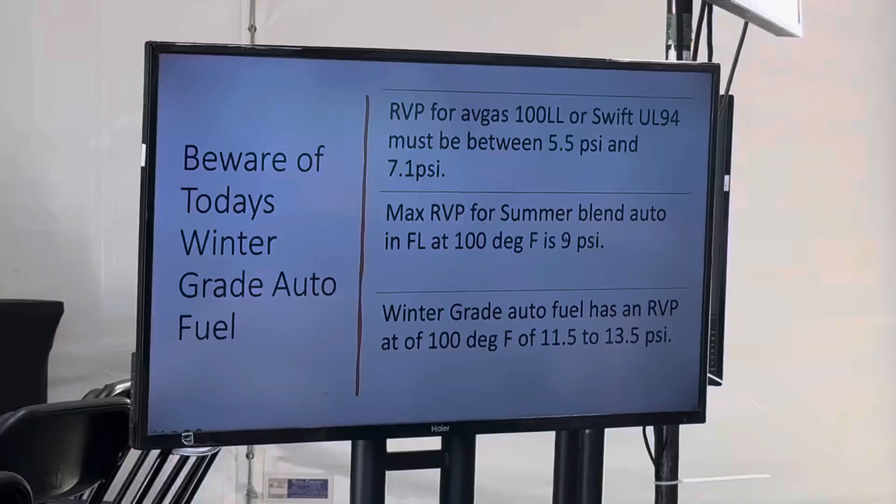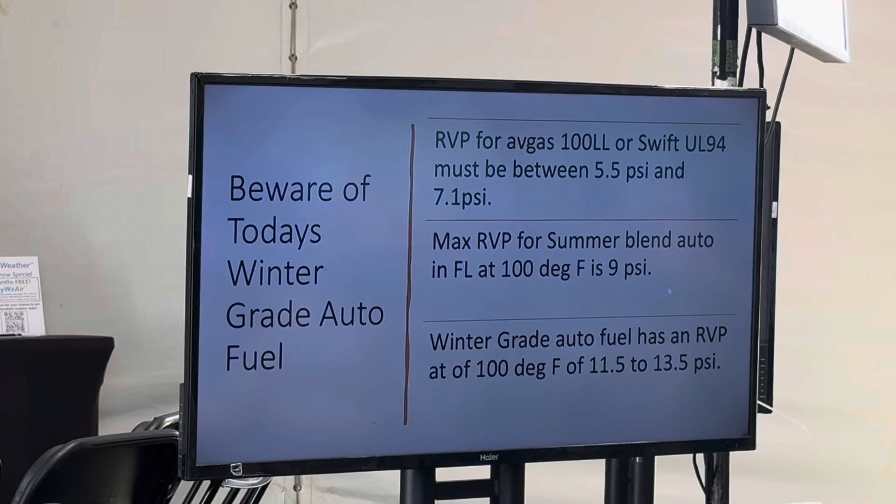Pressure at 100 degrees Fahrenheit is up at 11.5 to 13.5 psi. So it's a lot higher, a lot more likely to want to turn into the gaseous state. Then the switch back happens September 16th, and then in the spring around the beginning of April, they switch back.

Even in Florida, it's everywhere. Yeah, it's strange, they just blend it for the whole country. They don't do different blends for different parts of the country. We probably don't even need it down here, but it would be too difficult for them to blend different fuels for different parts of the country.

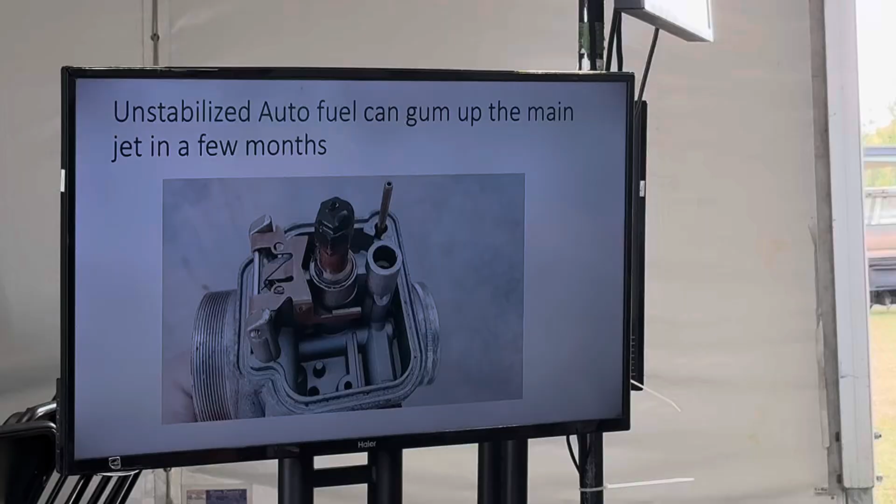And the fuel evaporated off, which it does, and left some of the heavier content of the fuel, which ends up being gummy tar. And you can see the main jet's all gummed up.

The jets that are usually affected the most by autogas, if it's stale, is the idle jet, which is right here in the center of the carburetor, down in that little tunnel, the main jet, and then the air screw. So those are the three things. If you have some auto gas that's sat too long and it gets skunky, those are the three jets that would need to be cleaned if you can save it without tearing it apart and overhauling it.

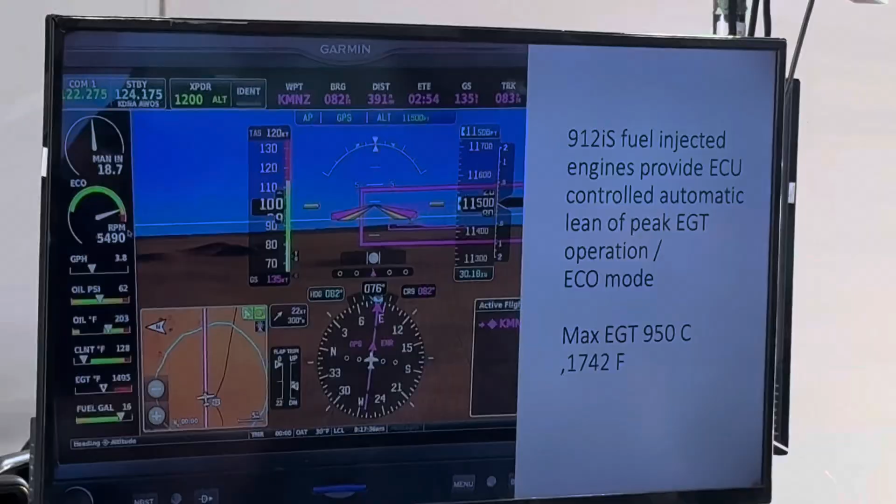I've got 120 knots true airspeed, and I am burning 3.8 gallons an hour. So that's the kind of efficiency you can get with the fuel-injected Rotax engines, because that engine is running lean of peak, and the computer is doing it all for me. So pretty slick.

Most automobiles have oxygen sensors, so the computer is constantly looking at the mixture and can adjust it on the fly based on reality. If you're using leaded avgas, you can't use an oxygen sensor because the lead will ruin it, so you pretty much have to pre-map everything. Rotax is set up for oxygen sensors. Once there is a complete replacement of 100LL, they can add that and get even more tuning into their system. But at the moment, they've spent thousands and thousands of hours and God knows how much money pre-mapping every possible altitude, RPM, and temperature.

I've seen the log files—it's unbelievable how many different checks they have. That computer knows for any combination you throw at it what the best mixture is, how to run rich of peak, how to run lean of peak, does it all automatically. It really is an impressive engine.

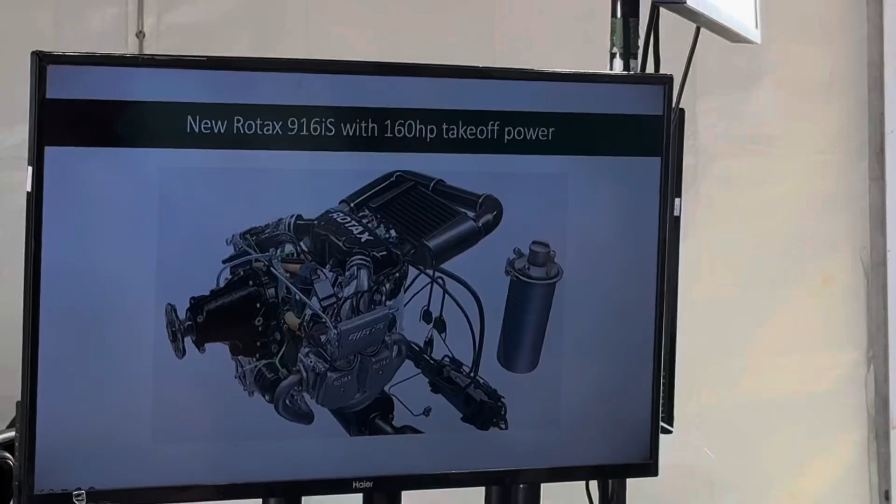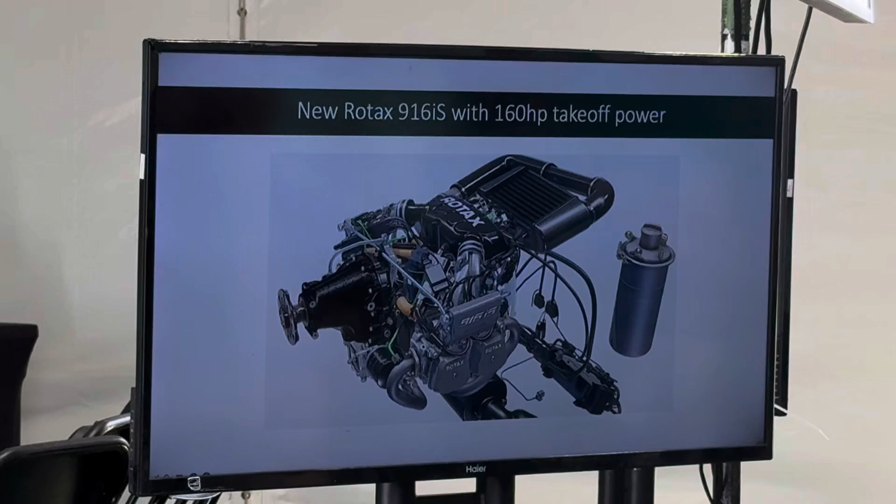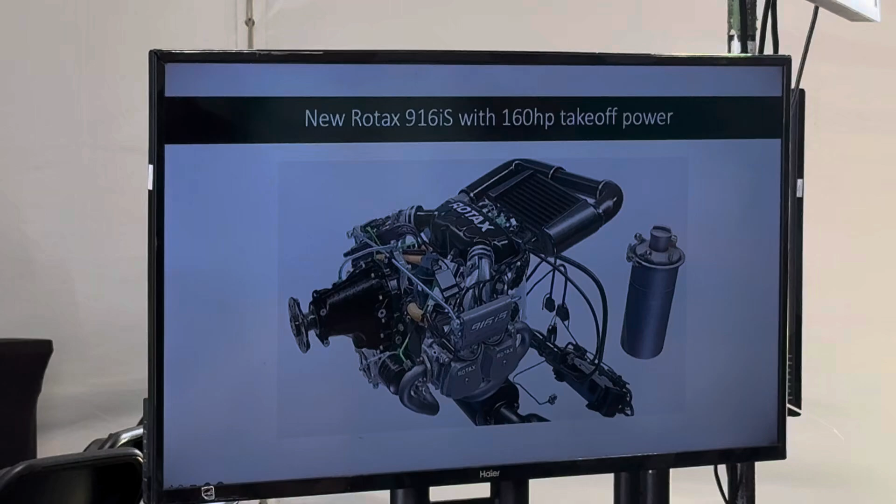This engine has the same displacement as a 912 iS, 912 ULS, which is a 100 horsepower engine. They are boosting it to 160 horsepower. It can run at 135, 137 on the 916, continuous output. Just to put that in perspective, a 180 horse engine running at 75% power produces 135 horsepower. This engine can produce 137 continuously, so it can cruise like a 180 horse engine.

Takeoff power, max takeoff power 160, 2,000 hour TBO. All the engines we're selling in the US come with a 5-year, 2,000-hour warranty from the factory, so they are really standing behind this engine. They're very sure it's going to last.

I've been operating one in an RV12. We've developed a firewall forward package for the RV9, and the performance we're getting is nothing short of amazing. We can do 190 knots on 8.5 gallons an hour with that airplane at altitude. And again, it runs lean of peak automatically, so there's no mixture control.

We were out west in Telluride. If you go to our website, RV916.com, you'll see some of the comparisons we did with a regular RV9 with an O-320 in it, and it's just a whole different airplane. It's a completely different airplane.

Yes, sir, they actually came to us and asked us to do it. They approached us and said, 'Hey, we think the 9 would be perfect with this engine, and we don't have the bandwidth to do it right now—would you be willing to do it?' And so they've supported us. We use their test pilot for all the spin testing.

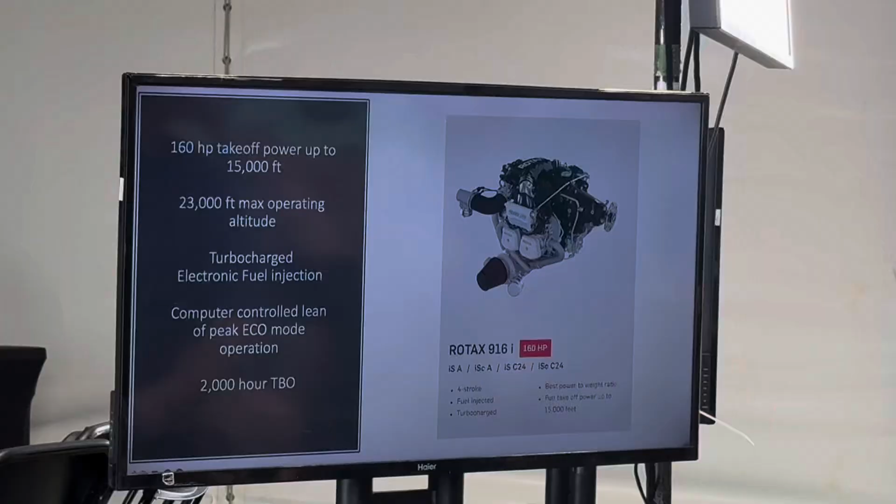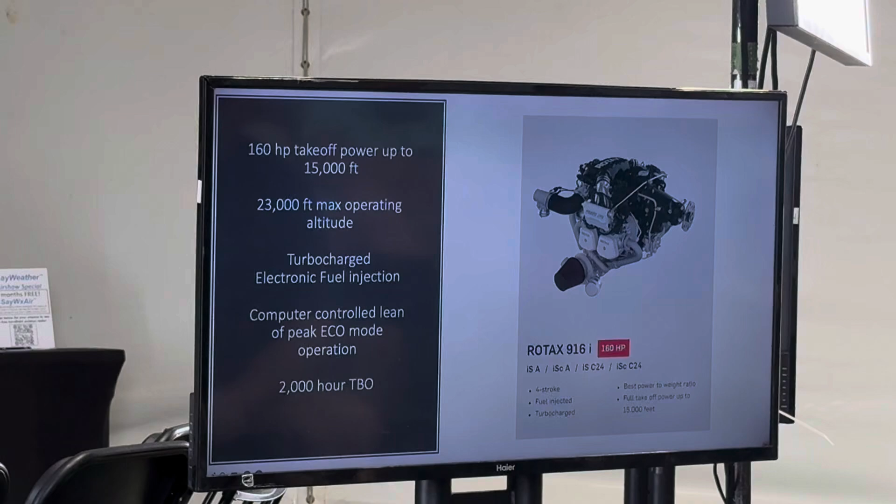I've found that I can maintain max continuous power up to 19,000 feet, so I can just be blasting along and still have full cruise power up to 19,000 feet. Max operating altitude is 23,000, turbocharged, fuel injected. Computer-controlled lean mixture is automatic in eco mode, with a 2,000-hour TBO.

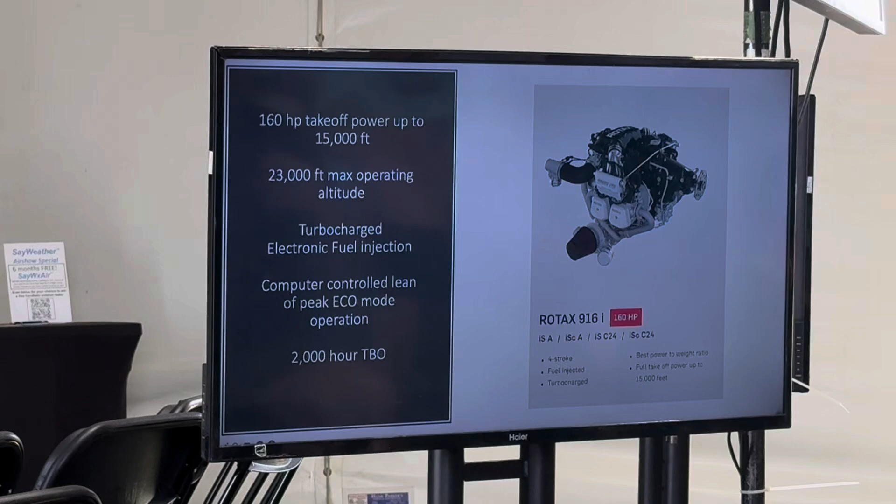Raise your hand if you remember what the max EGT is on a 912 iS. Anybody remember that? No, you're in the ballpark. Anybody else? Who said 1742? All right, you win a hat.